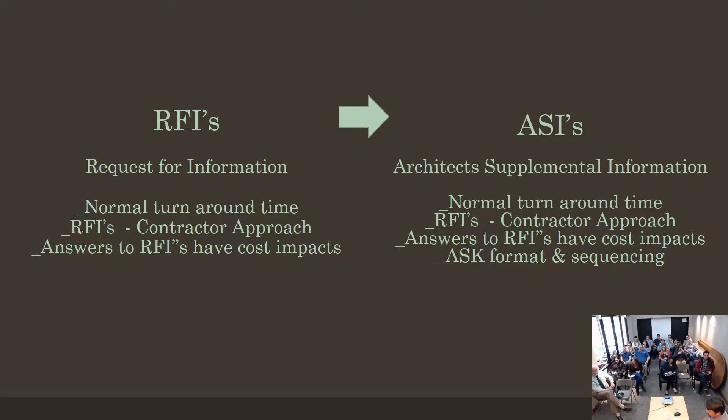Okay, so when you look at an RFI, this is part of what you're turning over if you're away. All the ASIs, yes, they're part of the O&Ms, as-builts that have all these notes transferred onto them, and then they also give copies of RFIs and ASIs, so they don't ultimately get lost. It will become part of the CDs.

In this case, you don't have to stamp an RFI. If you're going to issue it as a sketch, it has to be stamped. Where you issue it as an ASI, yes, those sketches have to be stamped. So in this case, this is just supporting information, not actually modifying the documents. Okay, good question.

Just pass those around, those are just copies of what they look like from an RFI standpoint. These are copies of the sketch we just looked at, so you can pass those around and take a brief look.

It's in the Revit template. In the Revit template as well? Okay, so yes, sir.

Is that the same for CAD or? Don't do that, try not to digress, okay? We're trying to move forward. I don't know, is it the same thing for CAD? It's just a little bit different, yeah. Okay, a little bit different CAD.

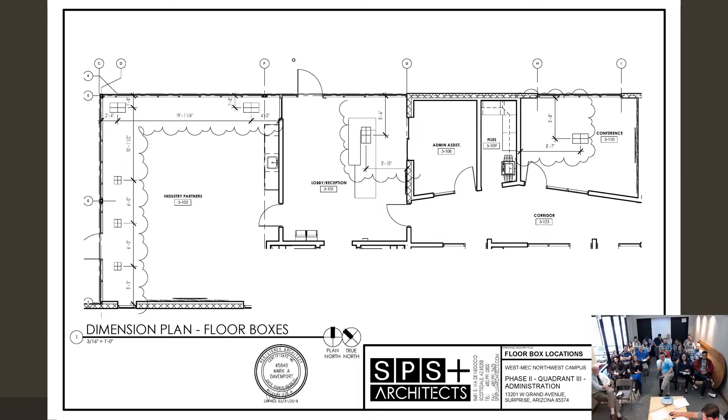So if you revise it, do you go R2 or? Okay, submittals and shop drawings, yes you do. That's why you gotta put an R1 usually to start it off, you just never know.

Okay, so submittals: multiple consultant reviews, Arch review is critical, compare to specs, identify approved equals. These are things you need to be thinking about if a submittal comes across your desk. First thing is, let's go back to the spec, compare it, make sure it matches what they're submitting on. Then if it isn't, we need to understand if it's an approved equal. It's not necessarily our determination to do that, they need to provide this information to show that.

Arch review is critical. Everything that goes out of this office, as a standard, is that architectural has to review it. I don't care if it has nothing to do with architectural, let's say a plumbing fixture or whatever, we still need to review it. Our standard moving forward is that if we have a limited review on it, we at least stamp it and match our comment to what the engineer did, so both those are going out the door with both stamps on top of it.

Make sure you at least take your eyes and do a brief look through it, just in case anything stands out that says, hey, they're not thinking about design or some different parts of it.

Multiple consultant reviews - we do the last review. As soon as it comes in the door, we kick it out to all the consultants, make sure they're reviewing it, make sure you kick it out together. So if structural's reviewing it and electrical's reviewing it, make sure they get together. Then we come back, we compile it in, Kimberly can help compile it in. We put our stamp on top of it for the last review and we're off and running.

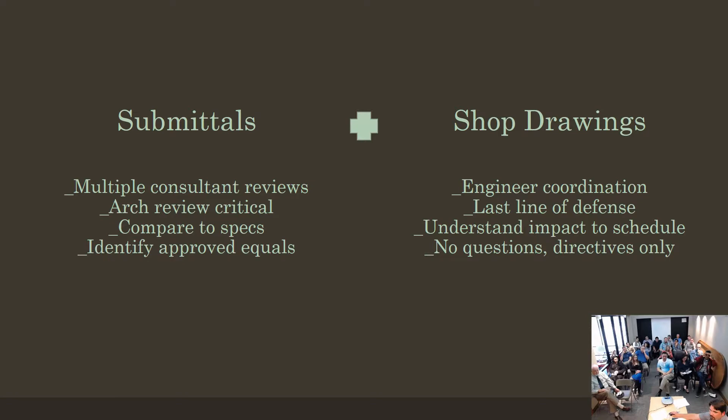Room signage is a good one too. Yes, room sign is the exact same thing, correct. Okay, one more item on shop drawings—our stamp.

The most important thing is the language of what's in the stamp, how we as the architect, the review is conformance only. The GCs themselves are still responsible for getting it done, and that's what the statement on our shop drawings says.

Review by architect implies neither approval nor disapproval. Responsibility rests solely with the general contractor per specifications. That's what our statement says.

Reviewed and noted, submitted, resubmit, return for contractor review, rejected. Those are the five options we put up there. You stamp one of those.

Nine out of ten times, if everything looks good, we still put reviewed and noted. Find something to say on those things, there's always something to say. It's a general comment, like field verify dimensions. Boom, we're done. Verify the location of so-and-so, just so we understand. Good job, big stamp.

That goes back to the second option, which is return for contractor review, right? We can do that. I don't even want to do that. I'm not wasting my time because it literally takes time in PDF to put these darn things on.

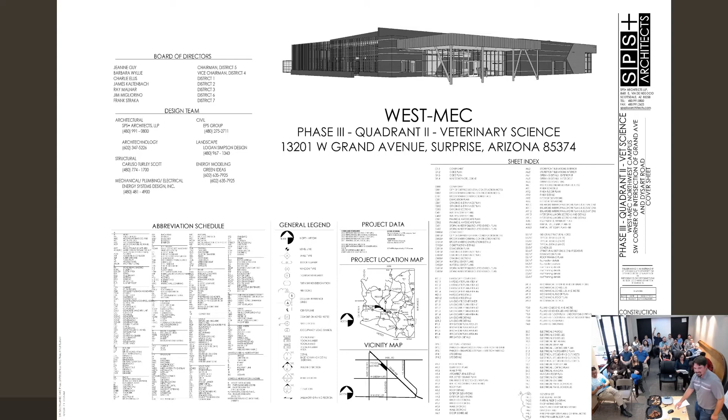What I want you to keep in mind with code sheets, aesthetics is everything. When I initially look at a code sheet, it should pop off the page at me. I shouldn't have to read through all the information on the side of the sheet plus what's on the plan. Think about that graphically. Get some hatches in there, get some flow so they can quickly understand where the corridors are versus the classrooms versus the office space. Help them understand that, because this is the first thing they're going to look at and how it's going to pop off the page.

The other thing is there's a lot of times there's details. If there's just 1 or 2 details, whether it's a Knox box, a fire extinguisher, a 2-hour wall, 1-hour wall type, maybe we need to do a whole code detail sheet. The less they got to go hunting through the set to find a specific detail, let's pull it to them, because we can do that a lot quicker than they can, and put it right next to the sheet so we can cross-reference it. You get a happier reviewer in the end, this will work.

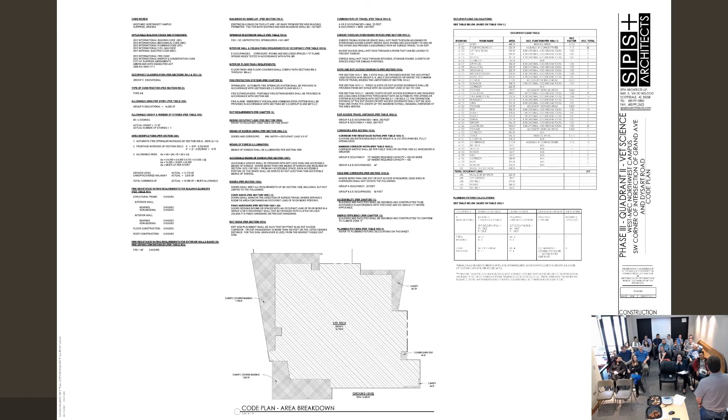So sometimes it doesn't make sense. You're like, man, I gotta...